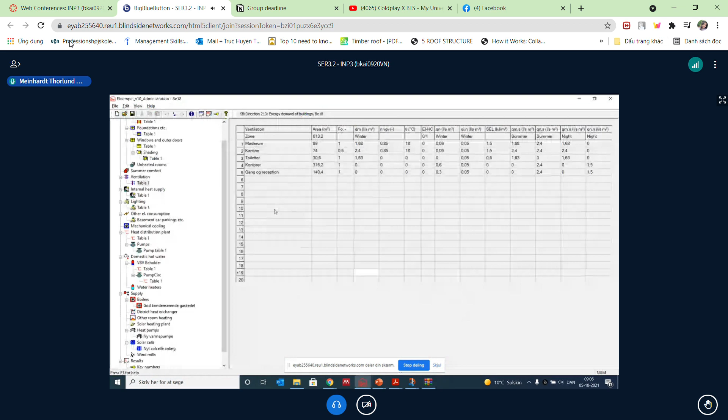Else it might end up giving you some problems. The only reason there's older versions of BE18 is if you have a project which is locked on to an older version of the building regulation itself. That's why. And I'm not sure about this, but if you use this login for the website where you find the SBi instructions, I think you can use this login as well. I'm not sure about that.

Okay, so now you have the license file for BE18, and it's in our folder called services, building services. Okay.

Let's talk a bit about ventilation. Again, my name is Paul, and as I told you before, I'm a civil engineer. My specialty is energy and climate.

So, the background for ventilation: obviously there are a lot of reasons to ventilate. First off, a fun fact: 35% of the energy used is for heating and ventilation, the air quality, basically. 90% of the time, at least in Denmark, we are indoors. So basically, we're outside for 10% of the time, and 90% of the time we'll be inside somewhere.

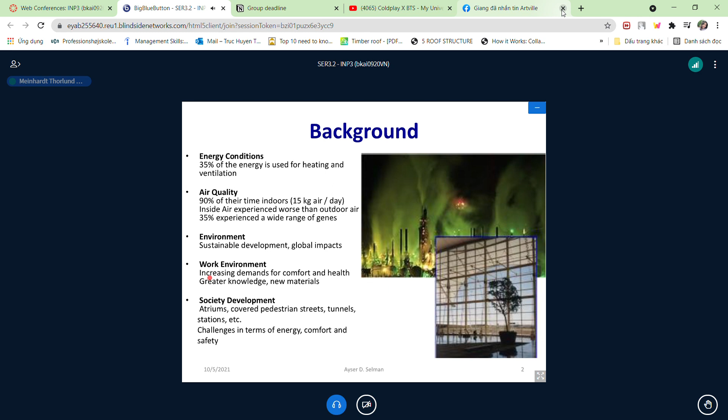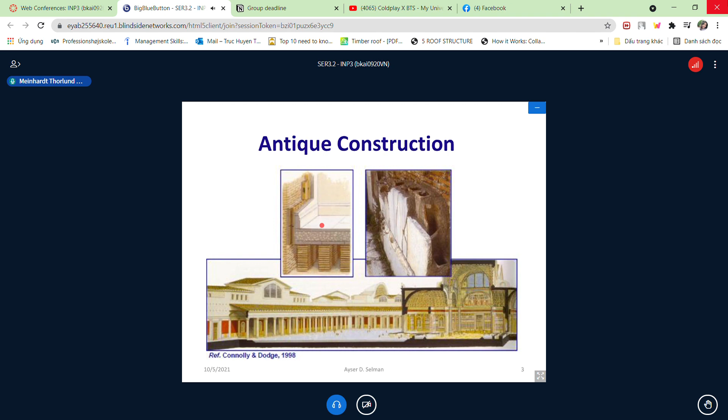The suggestion here is just to point out that the indoor environment is something mankind has considered for a really long time. But this is more for comfort and not for health, I guess. Or you could say if it's really cold, it could be for health. You could probably get a disease if you can't keep your temperature. Yeah.

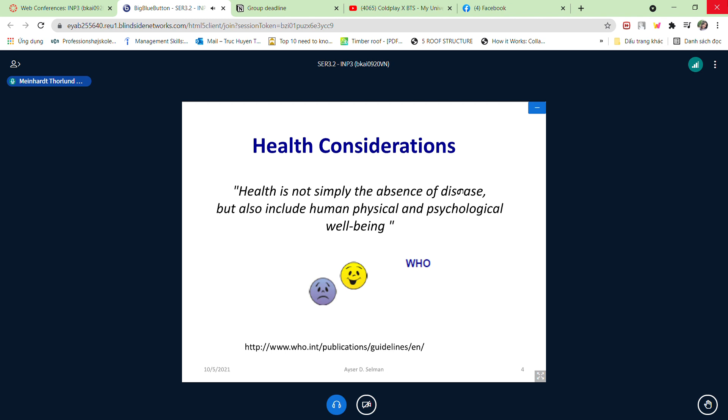Health is not just the absence of disease, but also includes human physical and psychological well-being. This is from WHO, and it has been in more and more focus over time, especially in Denmark. We're not only supposed to think about energy savings, but also about the indoor environment, and not only in relation to not putting dangerous particles in the air, but also the physical and psychological well-being. Do we feel good, etc.

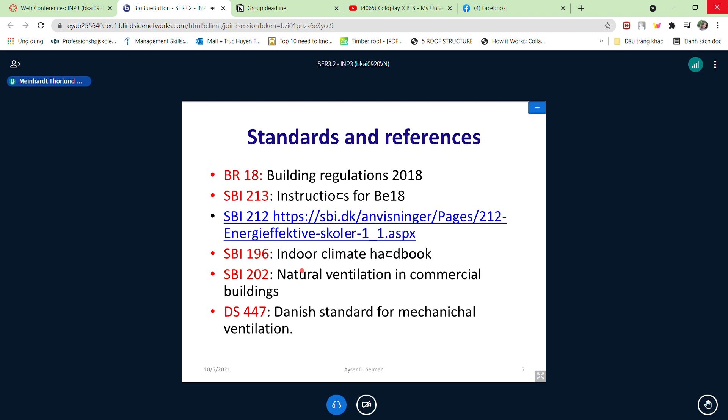So what does the building regulations say about thermal indoor climate installations for heating and cooling systems? In general, it says that where people stay for longer periods of time, it must be ensured that a satisfactory thermal indoor climate in terms of health and comfort can be maintained, given the intended use and activity of the room. And we're going to look into that. What does that actually mean?

But basically, for longer periods of time, I've asked the people behind the building regulations how long is a longer period of time. And the best answer I could get, it does not say anywhere in the building regulation, but they told me for a classroom it would be 45 minutes. So basically, if you're having a lecture of 45 minutes, your stay is a longer period of time. So in other words, if you have a meeting that is going to last at least 45 minutes in a room, or a reading room, it will also be considered a longer period of time.

Rooms that are not considered longer periods of time could be hallways, receptions. If you have a room like a copy room or server room or something like that, that could probably be considered not a longer period of time. So overall, these types of zones, we could say, should ensure a satisfactory thermal indoor climate.

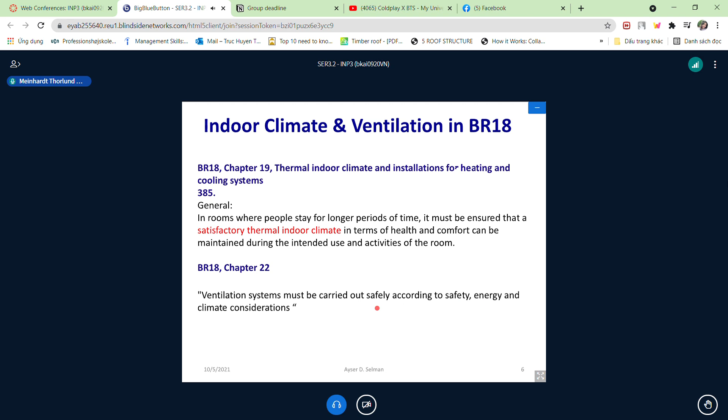So basically, those are two of the most important paragraphs in the building regulation. I wouldn't say it's vague. It's just in text form, but luckily we have SBi, the building research institute in Denmark, who have made, you could say, a mathematical guide to how to calculate this. How do we ensure a thermal indoor climate and good health, etc., and in doing so, have a low energy consumption. This is something we're going to look at today.

Yes, so again, more specifically, ventilation: buildings must be ventilated to provide a satisfactory air quality. And when we say air quality, we think about the CO2 level of the air. At least this is how we measure it. And the moisture: we should not have too much or too low moisture in the air when we consider this ventilation.

Furthermore, the ventilation system also opens up some problems in the building, such as if a fire starts in the building, the ventilation system could actually supply the fire with oxygen. So we need some kind of fire strategy. So basically, the planning, construction, operation, and maintenance of the ventilation system should be carried out such that the risk of fire and its development is minimized. There's no risk of injury to people or damage from the installation parts. So basically, we should not be able to walk into them, or they should, of course, not fall down or be a risk for injury, etc.

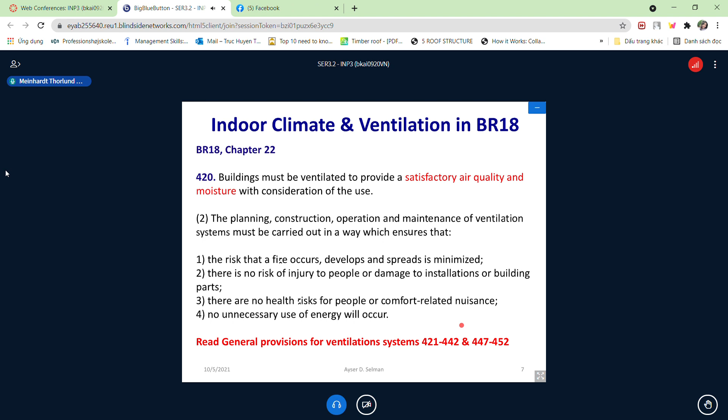For instance, we have to look at leakage in such a way that no unnecessary energy use will occur. So basically, that would be controlling the ventilation system. If the ventilator is going to try to work harder and harder while at the same time we're closing off with a valve or something, that will create unnecessary energy usage. So this is something we have to take into consideration while looking at ventilation.

In Denmark, we have something called the Arbejdstilsynet, which is the work inspection. It's basically a government institution that does regulation and inspection regarding the working conditions at different kinds of companies and makes sure that they follow the rules that are there.

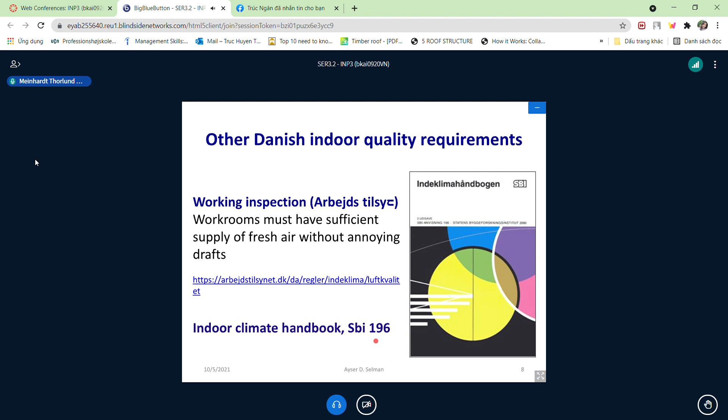Some of the rules regard ventilation, and that includes that there's sufficient supply of fresh air without drafts, etc. You can find some of their regulations regarding the indoor climate at this website. Basically, some of them are built on this old indoor climate handbook from 2000.

Okay, planning stages. So what do we need to consider in the planning stages? First off, we should look at the internal loads and the room conditions. Internal loads could be people, equipment, working instruments and lighting. The conditions of the room are the room temperature, airflow, air moisture, air speed, noise level, air cleanness, etc. So there are a lot of different parameters we look at when looking at indoor environment, also depending on whether it's thermal comfort, atmospheric comfort, etc.

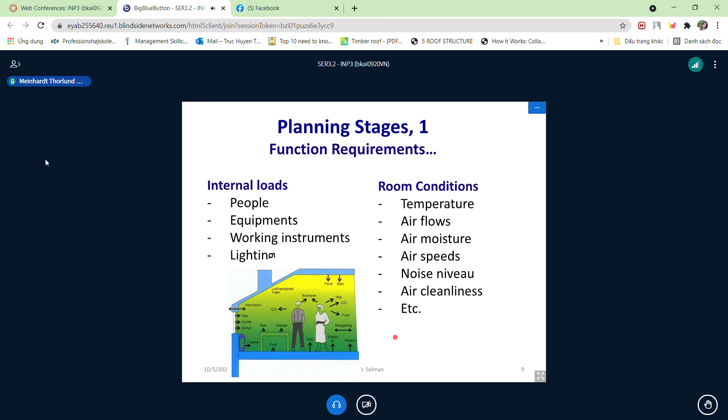Furthermore, during the planning stages, we should also look at the outside conditions. In winter mode, normally we look at an air temperature of minus 12 degrees and a relative humidity of 90%. I will show you later. For summertime, there are not the same clear recommendations, meaning that depending on what kind of building we build, we'll use different worst cases. In some cases, the worst case is humidity, and in other cases, the highest temperature. It's a combination of the outside air temperature and how much solar incidence we get from the sun.

In Denmark, we can have a condition where the outside air temperature is pretty low, like 15 to 18 degrees, but if the building has a lot of windows to the west or east, and during the autumn the sun is really low, you can actually get a lot of energy through the windows. This could be one of the worst cases in Denmark, during the autumn or fall. Whereas in summertime, the sun is high in the sky, and you don't get as much direct light through the facade. That's why this is unclear, because the summer situation is not the same for all buildings. It changes depending on how you design your building.

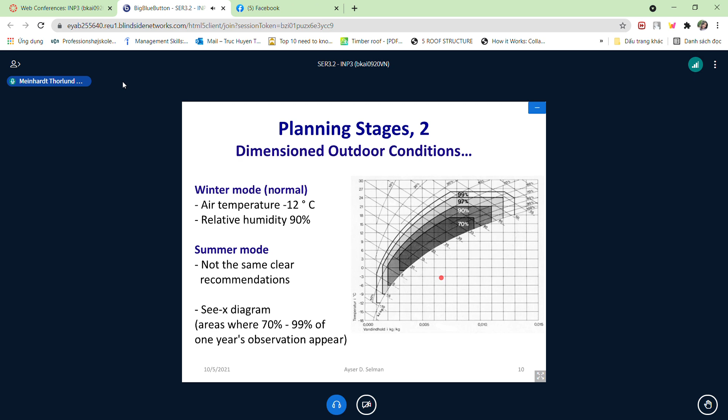So if we do a period stationary calculation, it's basically doing, I would say, a one-page calculation. This is basically a quick method for calculating how much energy per second will be added to the room by the people, by the equipment, by the sun, etc. And how much do we need to remove from the air through the ventilation and cooling system

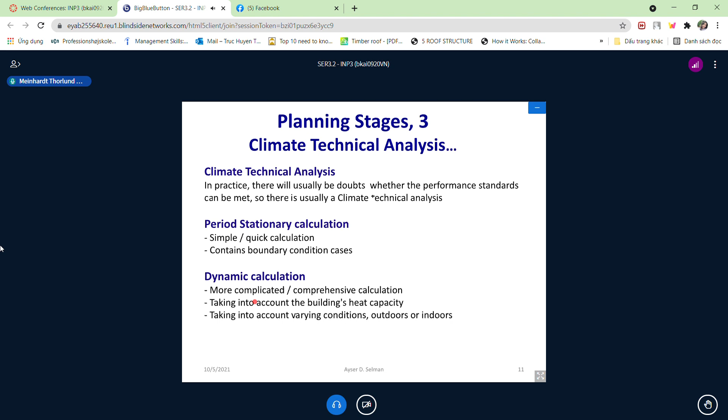I've been in many projects where we do just a fast calculation for different kinds of rooms. And then I've also been in projects where already in the planning stage we do some kind of dynamic calculations. If the building owner is really focused on the indoor environment, they'll probably pay for that. Yes.

So first off, we'll do a detailed design of the system, looking at the individual rooms, including airflow, heating, and cooling, and air filtering, etc. And then we'll select the ventilation principle and the system. Determination of type and location for the air supply and exhaust diffusers. So basically, where in the rooms do we place the inlet and the outlet?

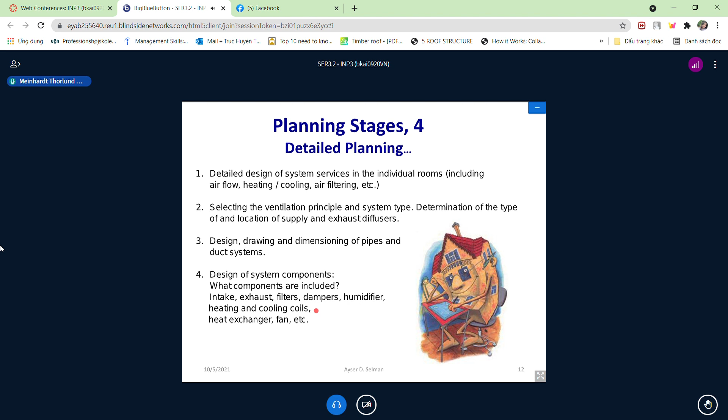Design dimensions, pipes and duct systems, and then we look at the components, the system's components: intakes, exhaust, filters, dampers, humidifier, etc. There's a 10 steps guide for this.

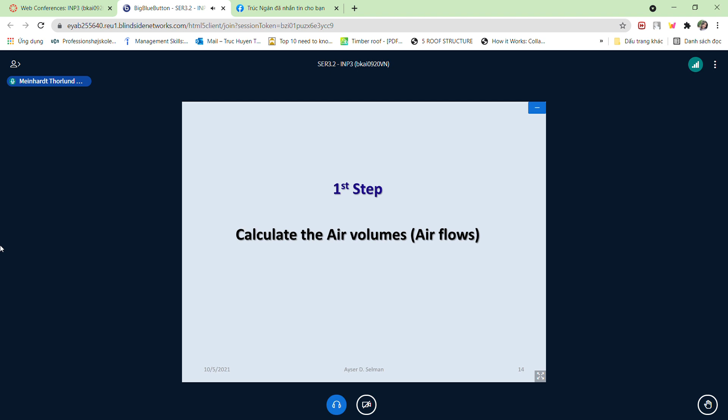The first step for looking at the indoor environment would be calculating the air volume, basically airflows. So how do we determine the airflow and why? Basically to size the ducts and the aggregator, basically the ventilation unit, the AHU. So we need to know how much air.

Basically, the first thing we should do is calculate how much air we need, because we want to know how much air we need in the different rooms, and depending on the worst case for all the rooms, this is how much the ventilation unit or the aggregator should supply in total. And then we look at the ducts. Each duct, you can see, branches from the ventilation unit. They should also be able to contain the air volume that we have actually calculated.

But in order to decide how much air flows, you should also look at the level of climate comfort. Why do I say level of thermal comfort, or not just thermal comfort, but just level of comfort? Because, as you can imagine, indoor environment is a subject that is really based on one person's own experience, because you can actually have a room where some people will find it cold, whereas others will find it really good, and you can also have some rooms where people will think it's too hot, whereas others think it's too cold.

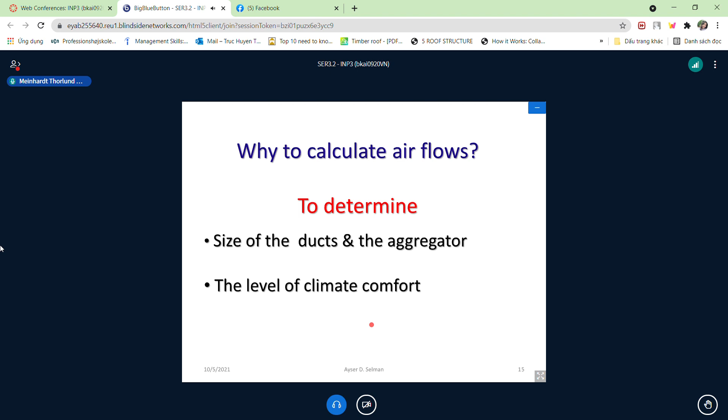There's something you probably already know. And I always bring my girlfriend as an example. She always thinks it's cold, whereas I always think it's hot. So that way, in order for us to be happy about the indoor environments, I often go around with a t-shirt, and she will have a sweater on or something, and then we can experience roughly the same amount of thermal comfort, or at least we'll both be in thermal comfort.

So first off, just take a glass of water.

You can always start at looking at what are the requirements from building regulation. So if you look at the building regulation BR18, the building regulation in Denmark, they have different kinds of regulations for, for instance, teaching rooms, schools, etc. But what you have to keep in mind is that this is only the minimum requirements. So in practice, sometimes it should actually be higher than the minimum requirements. So, if you ask me at least, this is not something you should design your system after. It should be more something that you check after, to see if you're actually maintaining the minimum requirements.

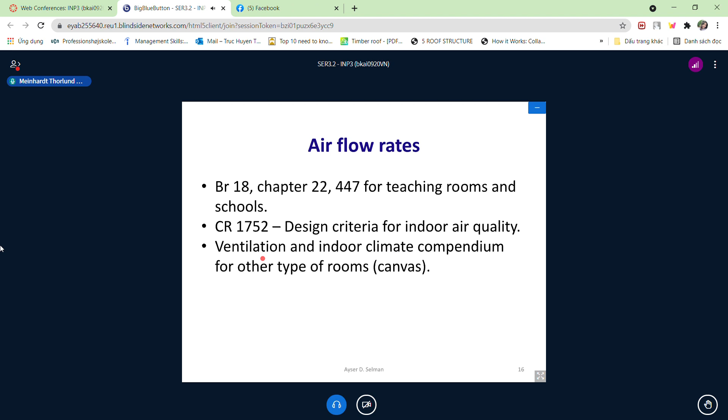There's a standard called 1752, which are design criteria for indoor environment, basically just containing some numbers on indoor temperature depending on which type of room we have, and which temperature and which airflow, CO2, etc. we need to maintain in order to keep either indoor class 1, 2, or 3, which means how many people will be satisfied. Or you can also look into the ventilation and indoor climate compendium for other rooms. So the compendium, the last one, I will show you the

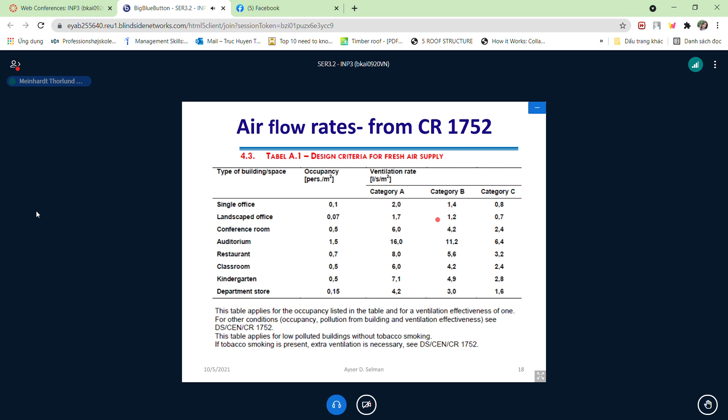So basically, the type of building. If we have a conference room, for instance, depending on if we want category A, B, or C, and if you want to know what A, B, and C are, you can always read about it. But basically, that's defined by what percentage of the people in the room are satisfied with the environment. If I remember correctly, it's 10, 15, and 20, or maybe it's 5, 10, and 15. So if you're going for a category C, it implies that 15% of the people in the room are going to be dissatisfied with this number. For a conference room, 2.4 liters per second per square meter. If you go all the way up, it's almost doubling, 4.2, and then 10% will be dissatisfied. So this is how you can use these numbers as a guide, design criteria for these types of rooms.

You can find further on in the ventilation and indoor climate compendium, and I think this one is also a part of this compendium, the English one. I think this one is based on experience from Danish companies. They met together in some concept and shared their key numbers experience for different kinds of buildings. So, for instance, if we're looking at a garage, a hotel, an industry kitchen, etc., these are some ventilation key numbers that they have from their own projects. It would be an idea to use these, at least for designing the rooms. So you can see that in these pages.

So before I go further, I would just like to add that there are a few of these tables in the Danish compendiums that I shared. So you can always open them, shuffle through the pages, see if you can find a table that looks like this, and try to translate it. If they don't have the types of rooms or buildings that you're looking at, maybe you can find them in the Danish compendiums, which we haven't translated yet. So keep that in mind. I also shared those. Basically, this is one way, a fast way, of starting a design and finding the airflows.

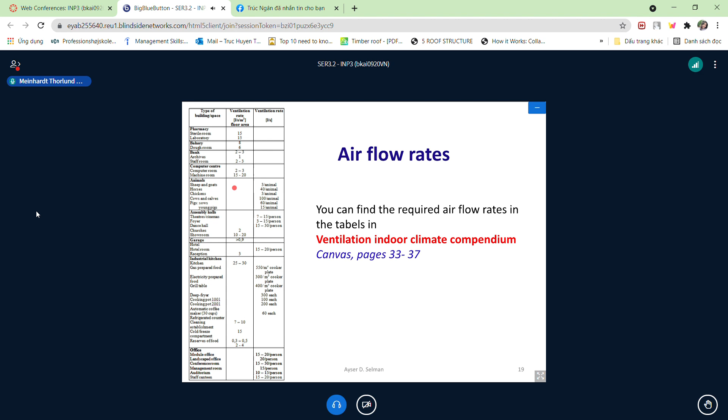So, choice of ventilation type. Natural ventilation is one I already talked about, basically meaning that we can get the air through gaps that we should in some way be able to control. If it's like opening and closing the windows, or some kind of valve or ventilation opening that we can open and close, and typically the air will be able to exit. We should have something opening on the roof because of the thermal driving factor of the ventilation.

Because this one will work pretty well if it's not windy outside and the room is hotter inside. What's going to happen is that the air is going to go inside to the hotter area, and the hot air is going to go upwards, and then you have some kind of natural flow of air. But if you only have a lot of wind, it's going to be pressure into the room and exit on the other side where there's under pressure. Okay, so there's a lot of ways to design natural ventilation, but there are also some good and some bad.

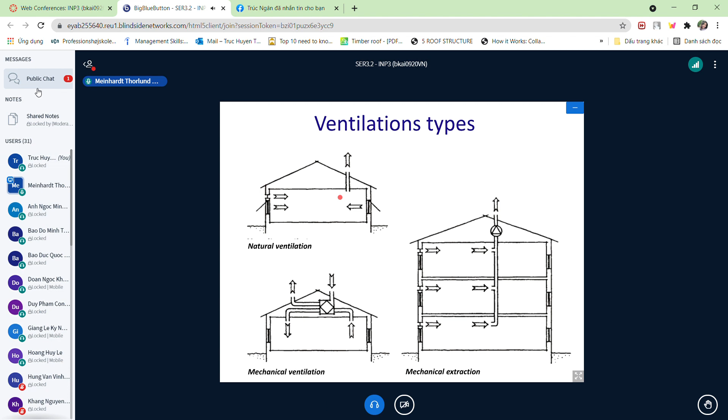Yeah, so you have a mechanical balanced system here. Basically, on the one side, we extract the air and it's hot. It's going to go to our ventilation unit, and within the ventilation unit, we'll have a heat recovery system in which we'll recover heat from the exhaust air and reheat the outdoor air before it goes in. And this is what I talked about yesterday, that this one has an efficiency factor. The minimum requirement for a one-story house building is like 80%.

Sometimes you can find some units that have an efficiency factor of roughly 93, 95%. So basically, meaning that most of the year, 93% of the energy that we take out of the room will get back in again for the fresh air.

And then we have mechanical extraction. This one, basically, we have a ventilator there and some kind of system. So when this one starts, it starts sucking the air out, creating an under pressure in this room. Under pressure just means that the pressure is negative inside here; you're creating some kind of vacuum in this room, you could say, and basically the physics will create a balance, so the air is going to get sucked in through these valves or whatever you have designed.

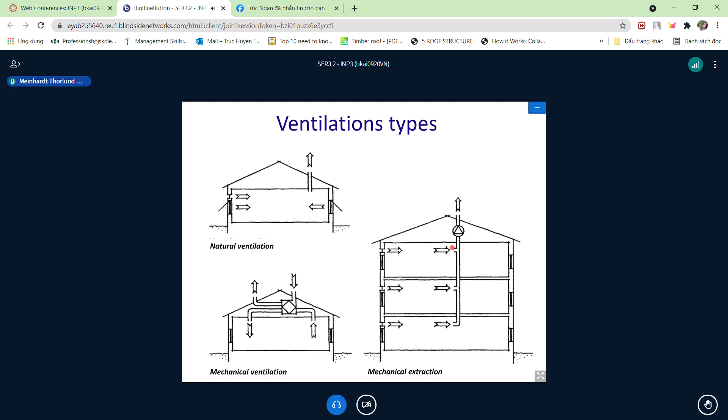This one, in terms of ventilation, it's pretty good. Except if you're staying too close to the windows during the winter time, it will probably be a bit cold, but basically this one works really well for the indoor environment. But it's going to be energy expensive because you're always taking cold air into the building and just leaving out hot air. And when you do the combination of these two, you will put this one above the kitchens, and it will only be turned on when you're actually using the kitchen. In that relation, you don't get a lot of energy lost.

So I think we're going to skip this part because the time is really moving fast. I think you should do this in your groups, probably when you're doing your project. So I'll just continue to the next one.

I can see that I've been talking roughly 45 minutes. So I think we should go out, have a small break, and get some coffee. Oh, sorry. Yeah, let's go grab a cup of coffee. I'll read your comment afterwards.